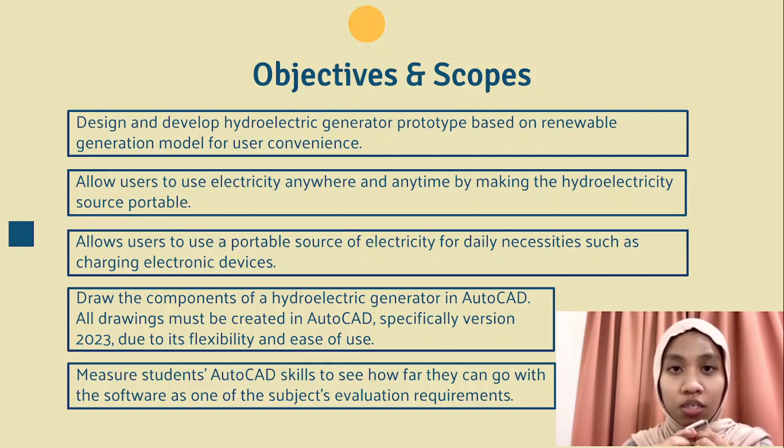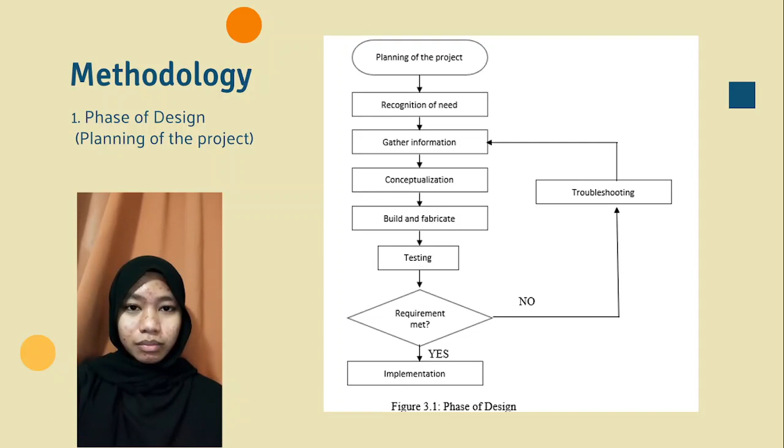Right, conceptualization. For this conceptualization, we use 3D mechanical computer-aided design, which is the AutoCAD program, to build the generator because it provides a better solution when constructing the prototyping by obtaining sufficient information for each part of the prototype design.

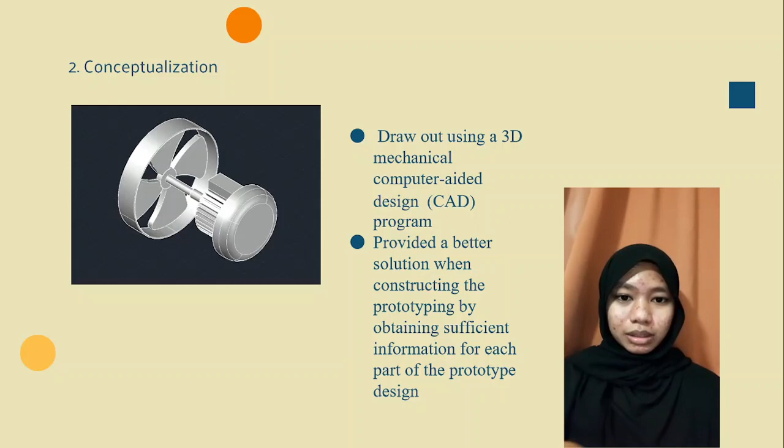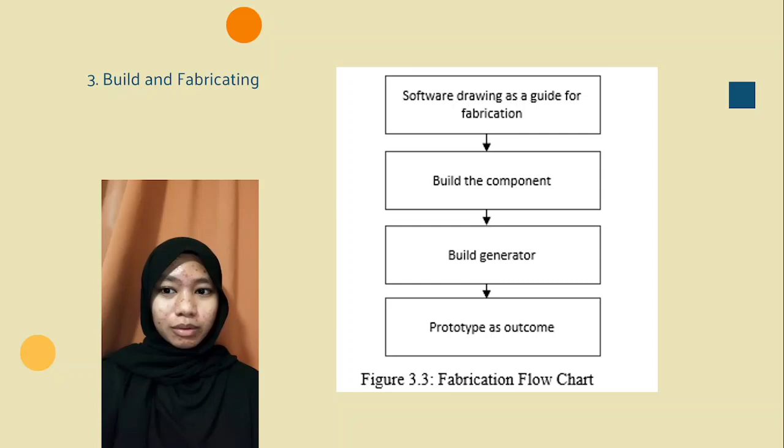These are the flowchart to build and fabricate the project. First, software drawing as a guide for the fabrication, and then build the component. Next step, build the generator and prototype as the outcome. To design the process of the generator, first build the fan blade, which uses the radius 9 mm for the center, and use the polar array to make the blade and copy it into 4 quantities.

And the second one is build the DC motor: make a circle with the radius 38 mm and make the length and the width of the gear 9.16 mm and 4.98 mm. And the third step is build the USB-A connector, which is build the connector with the shell 2 mm offset and create the pin USB-A to combine with the shell.

And the fourth step, build the cable charger, which uses the spline to make the cable line and make a small circle as the cable diameter, and combine the type A connector and the type C connector at the end. And then the fifth step is build the main casing using a cylinder with the radius 105 mm and the height 254.54 mm, and then make a small hole for the USB-A adapter.

And then the sixth step is build the main casing lid, which is create a cylinder with the radius 105 mm and the height 5 mm, and create a hole at the middle with the radius 7 mm, and then combine all the components, and it becomes the hydroelectric generator.

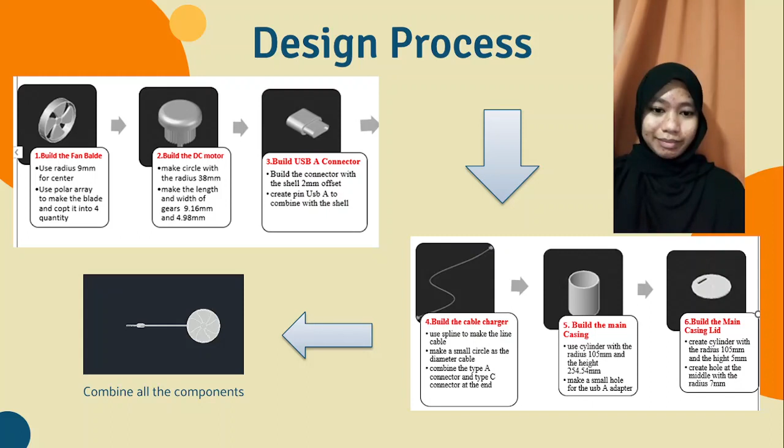For my part, I will explain about product design. So the first part is elements of product design. Technically, there are 3 key elements that make up product design, which are appearance, functionality, and quality. Firstly, appearance is important to appeal to users' interest.

Secondly, functionality is the most important part in designing a product because the product will be useless if it does not give benefits to others. Lastly, quality is also important because a high quality product will last long. These 3 factors must be carefully considered in order to produce a successful and competitive product.

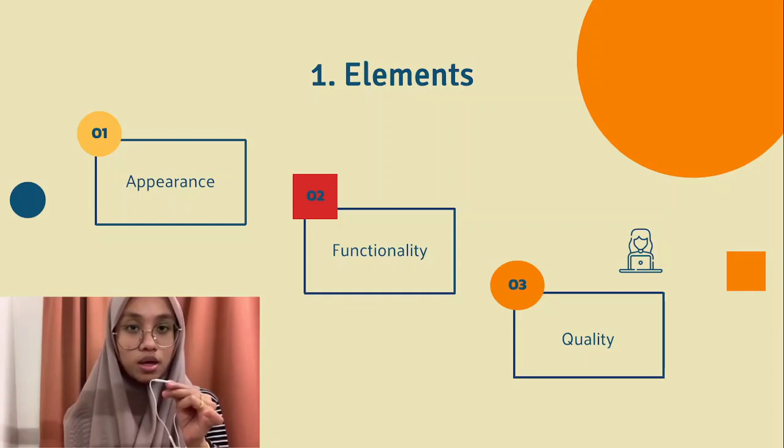An attractive and modern look, practical functionality that helps users deal with their problems or accomplish specific goals, and maximum durability. The second part is the process of product design. There are generally main stages in product design, which are brainstorming, defining pain points, and documentation.

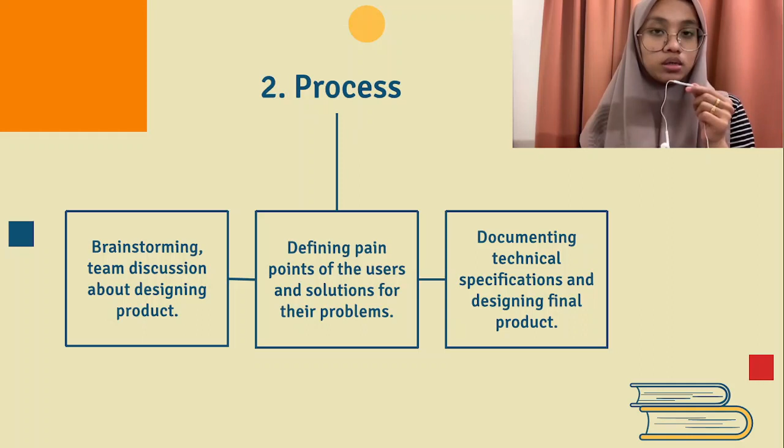First, brainstorming. This is where the team discusses designing the product. Second is defining the pain points of the users and solutions for their problems. And lastly is documenting technical specifications and designing the final complete product.

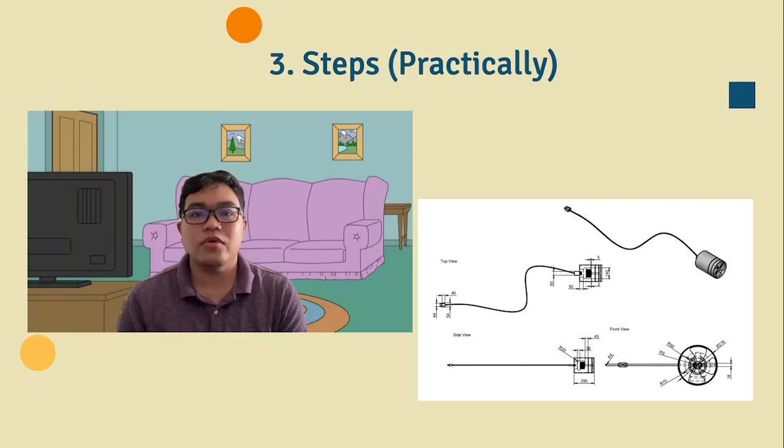My matrix number is DN2025, and for this part, I would like to show you how we design our project by using AutoCAD software. So this is our project. We are making a hydro generator for charging any devices that use a Type-C cable.

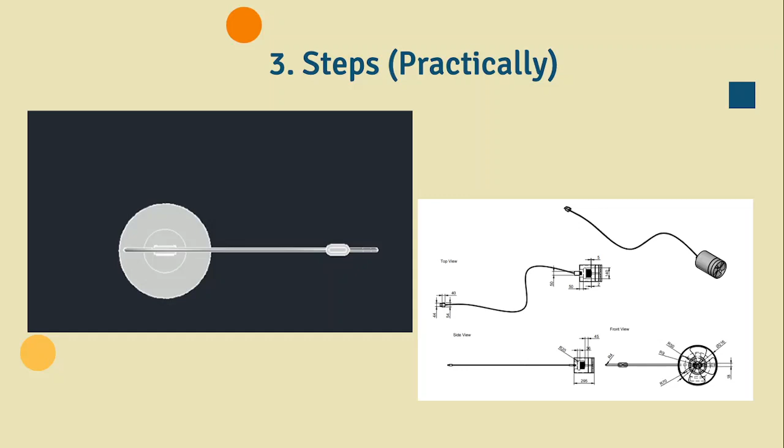So this is our back view, what the device looks like, our top view, and also our side view and the front view. This is how it looks when disassembled. So we have many compartments. For the first one, we have the blade, and we also have the DC motor.

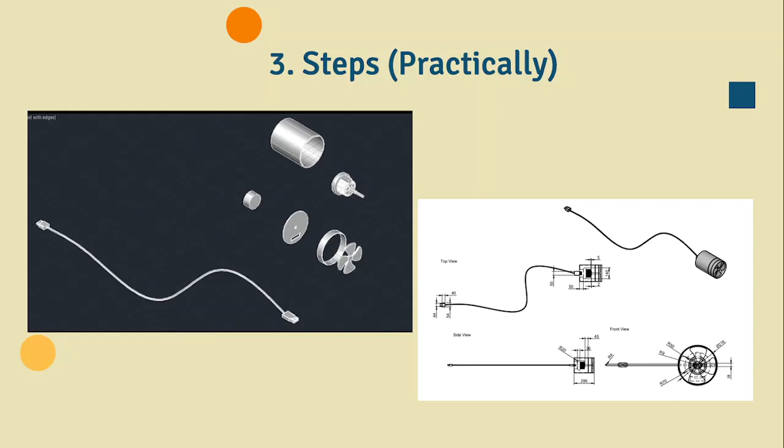We also have the USB-A adapter, the charging cable, which is USB Type A to USB Type C, the casing of the device, and also the cover of the fan blade. For the close-up, we are starting with our fan blade and the cover. For the middle of the blade, the radius of the circle is 0.9 cm.

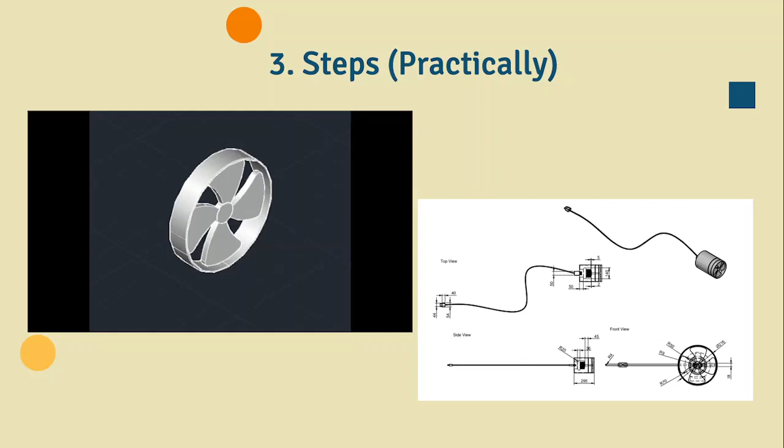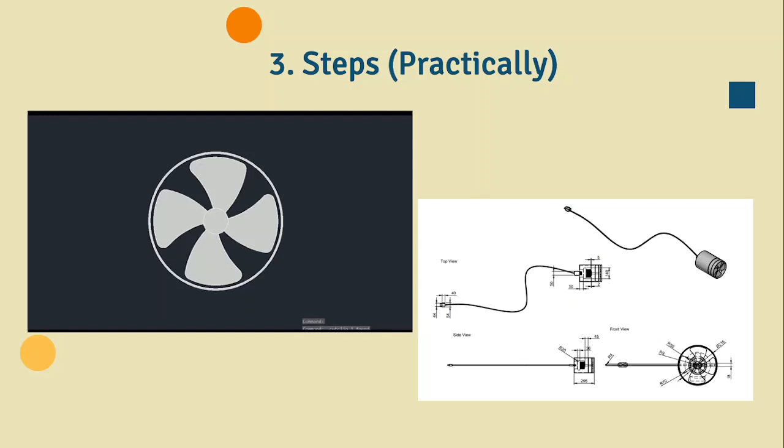After we designed the first blade, we used the polar array to duplicate the other 3 fan blades. For the outer ring of the fan blade, we are using a diameter of 216 mm. Next is our design of the DC motor.

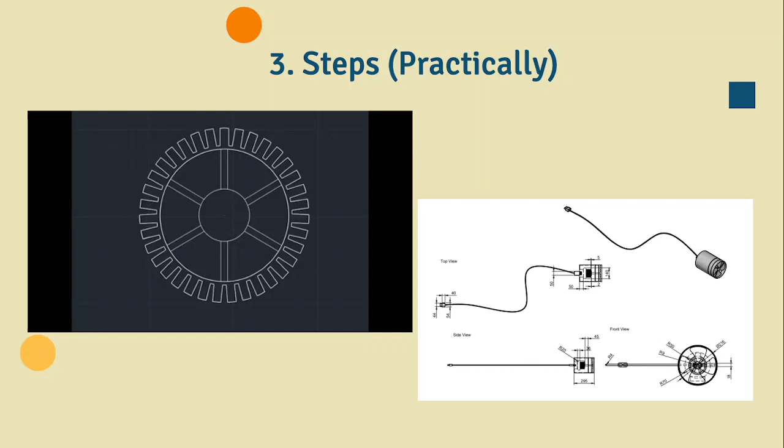As we can see, for each of the teeth of the gear, we also used polar array to duplicate all the teeth. When the gear is done, we used press pull to make it a cylinder loop. We also used press pull in detailing the DC motor itself. After that part is done, we used the cylinder 3D shape to make the rotary system. The rotary system will attach to the fan blade.

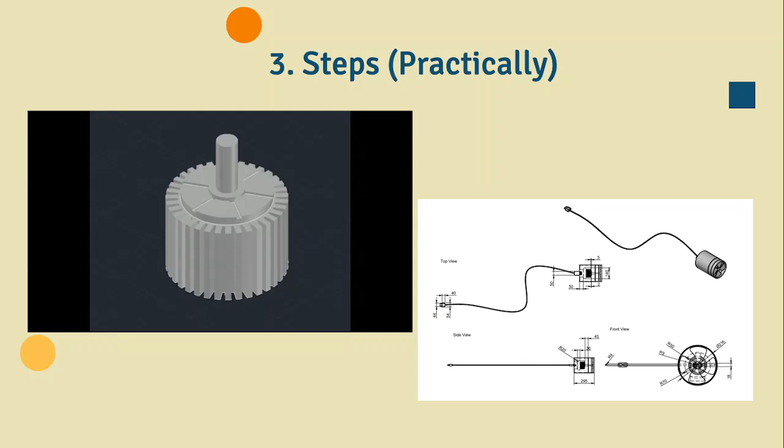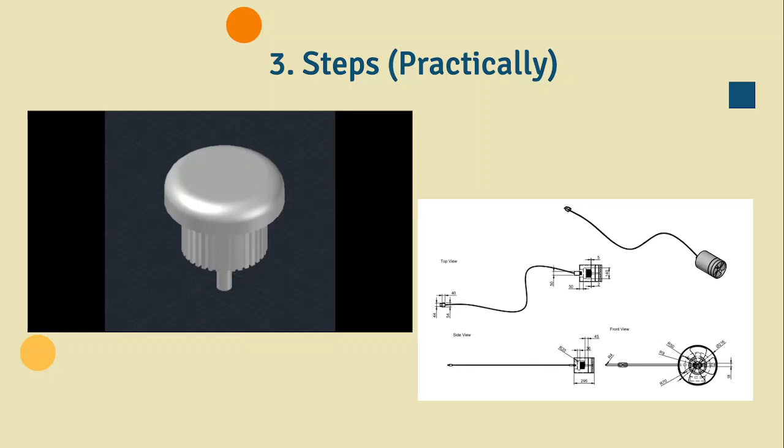At the bottom of the DC motor, we also used a cylindrical shape, and filleted it with a fillet radius of 2 to make it almost round, to attach the USB adapter. Moving on to creating the USB-A connector. The USB-A connector also has its own pins, so we designed the pins and combined them with the USB-A connector shell. This is our Type-C connector, and this is our charging cable.

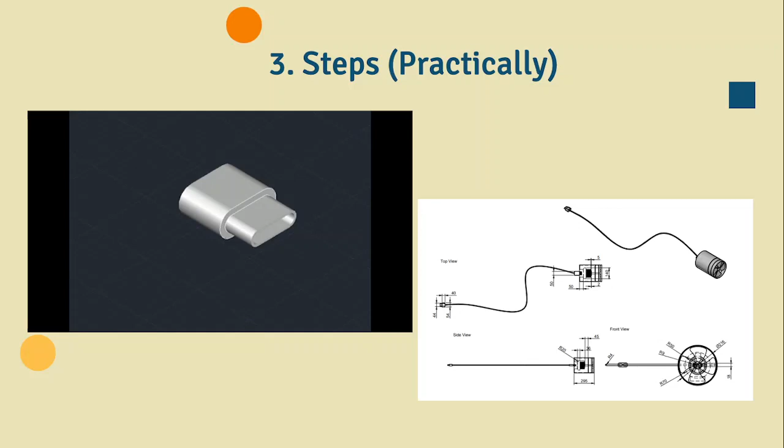For our charging cable, I'm using a curved line, and a small circle acting as the diameter of the cable itself, and then by using sweep we create a real life cable dimension of the Type A to Type C charging cable. So this is our end result of the charging cable. This is our outer shell or casing.

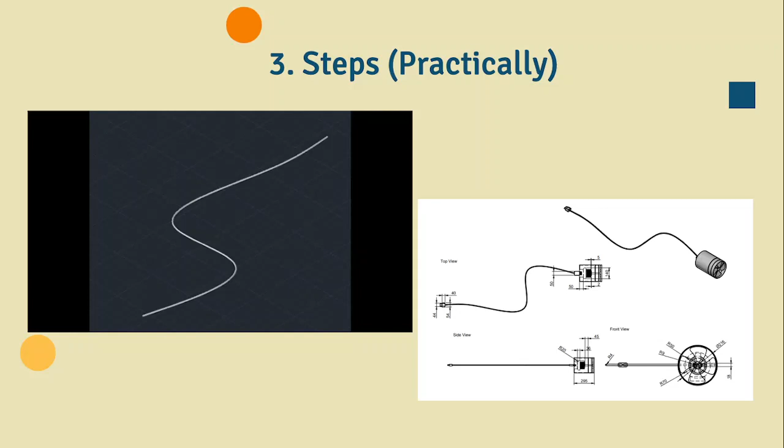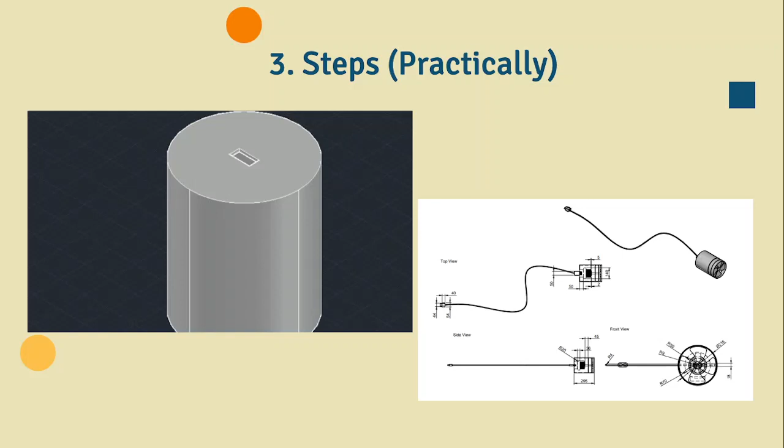For the lid, we also created a hole for the rotary system, and the square shaped one which we created for feeding water inside the hydro generator, to make the hydro generator start spinning and generating electricity. So that's all from me regarding our project design, which is the hydro generator charger.